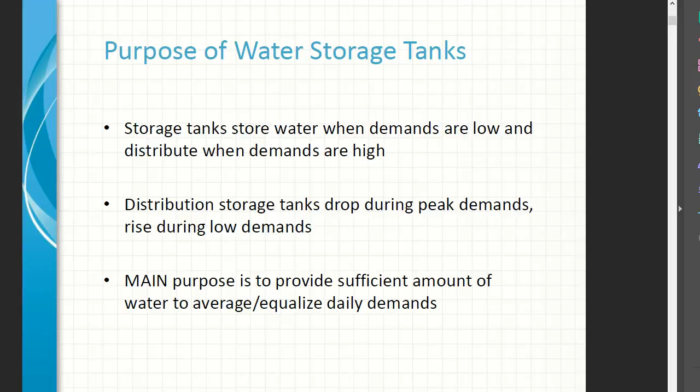What's the purpose of a water storage tank? Storage tanks store water when demands are low and distribute when demands are high. Distribution storage tanks drop during peak demands and rise during low demands. The main purpose is to provide sufficient amounts of water to average and equalize the daily demands.

We certainly know that a lot of fire systems are tied in with potable systems, so fire protection means meeting the needs of reserve storage. We've been through this horrible drought, and most of the utility agencies, in my opinion, don't have enough storage. I personally think it should be mandated that there's 30 days worth of supply if everything was to really go down the tubes. But we certainly want to meet the needs for average and peak demands, and meeting industrial water needs.

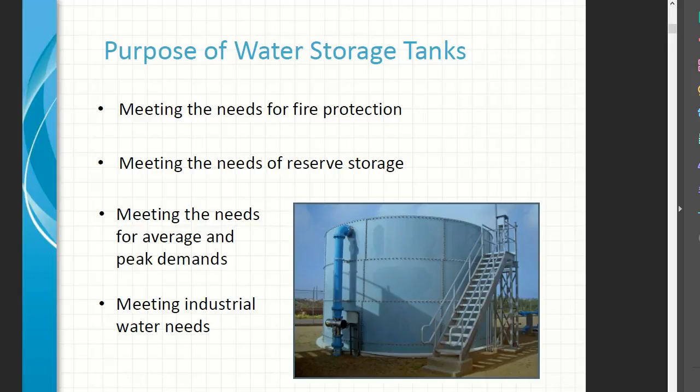The other advantages of water storage tanks: chlorinated water may be held for contact time. Power costs are reduced with off-peak pumping. It can serve as a sand trap to allow settling of sand and suspended solids. Inevitably with wells, there's a little bit of grit that comes up.

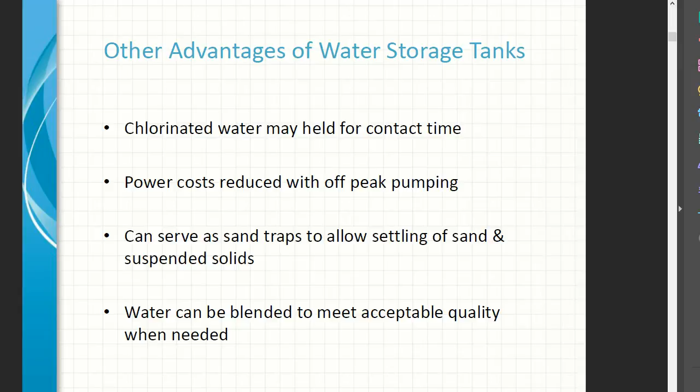Water can be blended to also meet acceptable quality when needed. Water blending is becoming more and more common, and what water blending is: if one of your MCLs, your maximum contaminant limits, is over, you might want to actually mix with another water source that has a lower level, and it'll average out and get within compliance.

So site selection, what are we looking for? Well, money is a driver on everything, but we certainly want to look at access to the sites, elevations available in or near around the area to be served, the relative cost of security, and the visual impact of a storage tank.

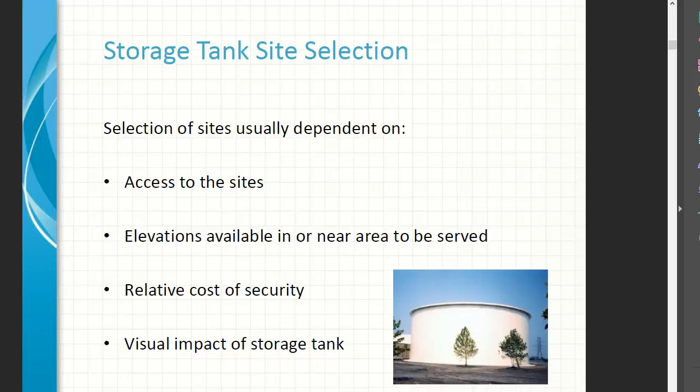We need to go ahead and have adequate covers to provide and protect against contamination. As of 2020, all reservoirs are supposed to be covered. That's a big hit for a lot of these small districts that have open reservoirs right now. It's very expensive to cover these. Drains and overflows shall be protected from cross connections to protect against contamination.

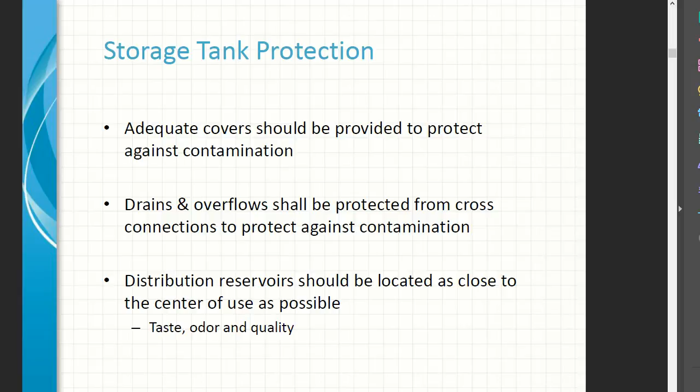The distribution reservoirs should be located as close to the center of the use as possible. And again, because of taste and odor and the quality of the water, we want to keep it fresh.

We have several types of water storage tanks: ground level, which are standpipes and reservoirs, elevated ones, buried ones, hydropneumatic ones, and clear wells.

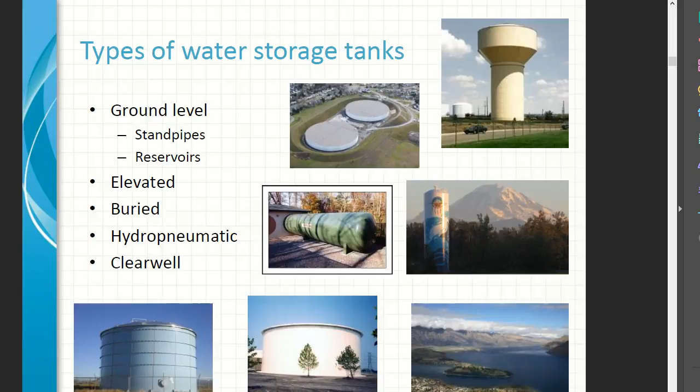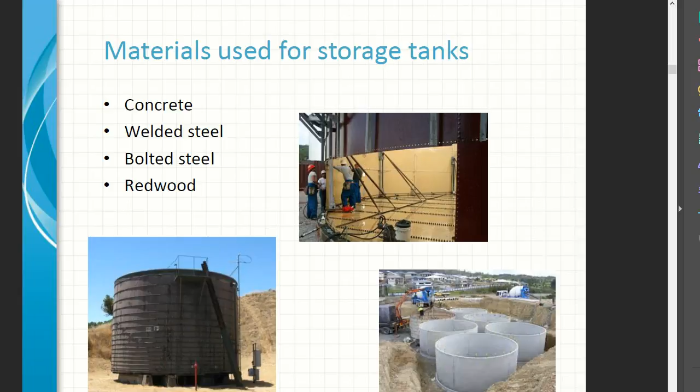What materials are used for storage tanks? Concrete, welded steel, bolted steel, and redwood. The upper picture is a bolted steel tank being put together. The lower left is a redwood, and the bottom right is a cast-in-place concrete.

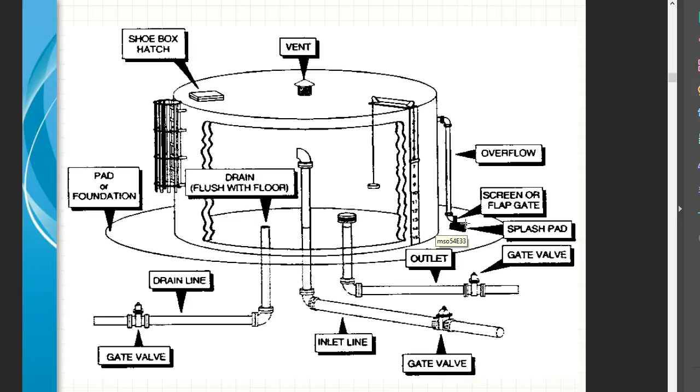So this is a picture about volume math. I know we had a lesson on math, but this is pretty basic, and all of you should have a pretty good grip on this at this point. If not, I urge you to go ahead and get into one of the tutors.

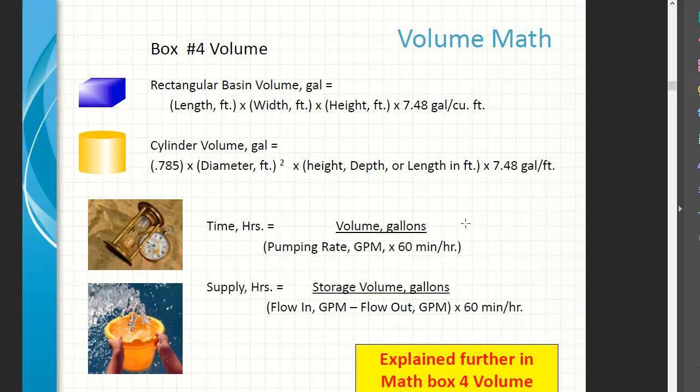So, partially buried storage tanks. What's the risk of those? Well, they can actually float right up out of the ground with upward force. Upward force is when you have a high water table and the tank empties, and it's like a beach ball. It wants to pop right up out of the ground.

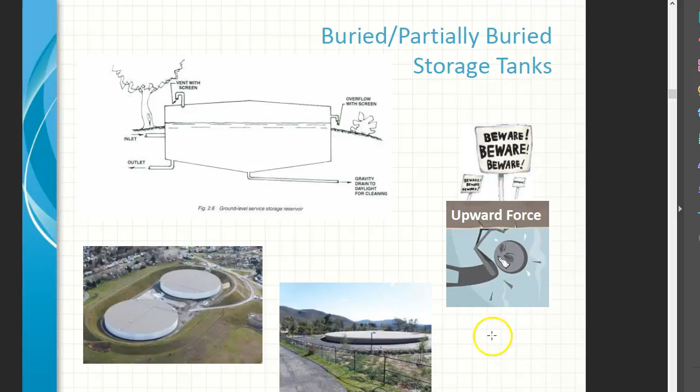You have all types of tanks, including some really huge submerged tanks, and these are very expensive. So again, we're talking about upward force, and that's a Box 3 math pressure.

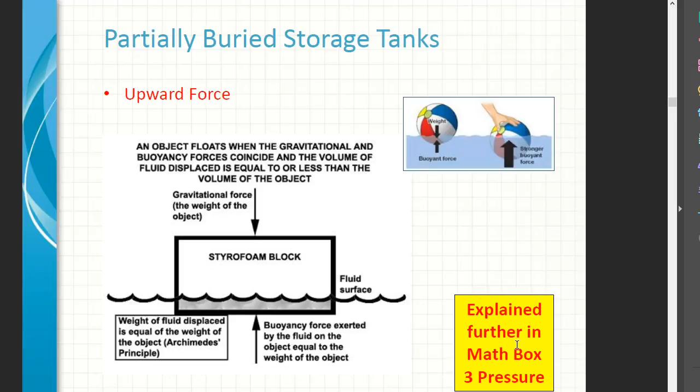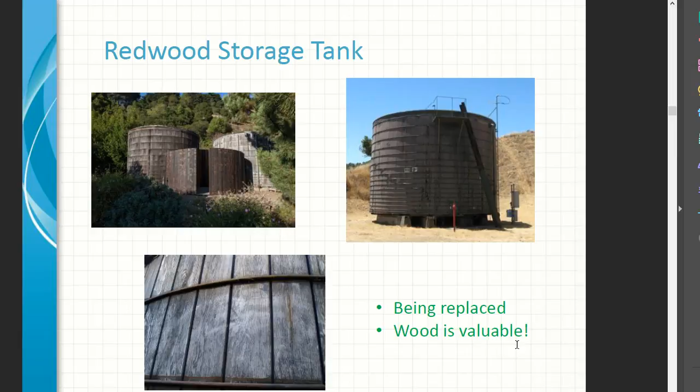Redwood storage tanks. There's a lot of them still out there. They were built out of the old growth redwood from way back at the turn of the century, and it's very valuable wood. If you're replacing that tank, you know what? You can sell that tank to a wood recycler. They remill it and make it into flooring and all different kinds of things for decorative purposes. A lot of Starbucks actually have redwood storage tank pieces in them.

Clear wells are usually at the treatment plant. They're used for contact time in the chlorination process. Contact time is slowing the water down because you want to make sure your chlorine has an adequate chance to work and eat up those bad things in there before it goes out into the distribution system. Now, you certainly want to have some extra chlorine, which is your residual, so when it goes out into the system, it's still protecting from any contaminants it could pick up in transportation through the system.

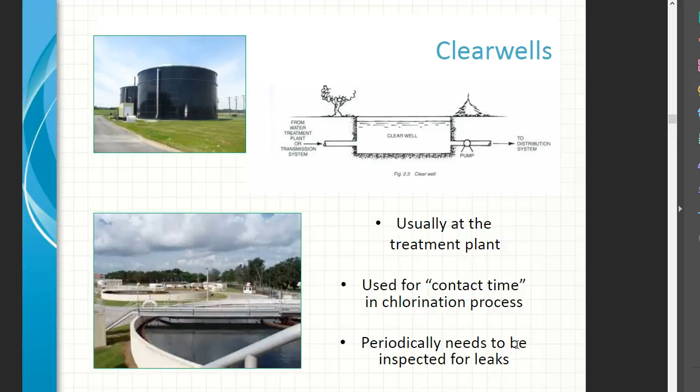You certainly need to make sure that you periodically inspect your tanks. It's just part of the gig.

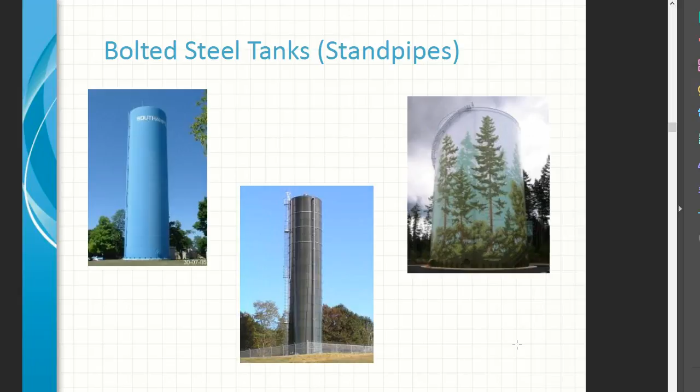Bolted steel tanks are also called standpipes, and the definition of a standpipe is it's taller than it is wide. You have elevated steel storage tanks - you see a lot of these down in the flatlands. The reason is you pump the water up and then utilize gravity to distribute it through your system.

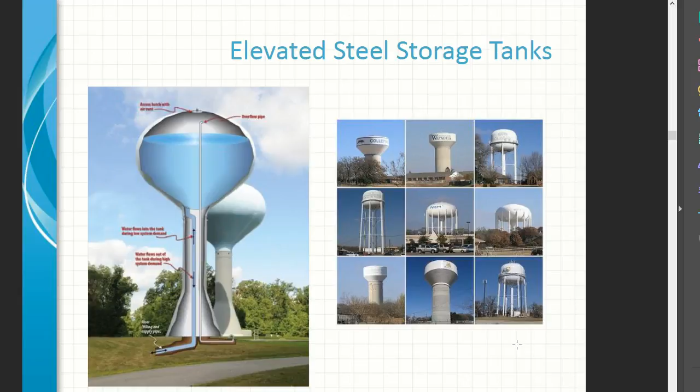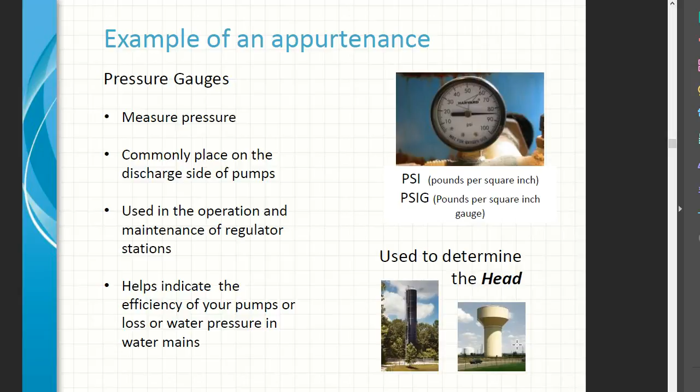Here's some examples of appurtenances, which are like gauges or anything additional that goes on the system. It could be a pressure sensor, it could be an air relief valve, but it's not part of that core distribution system - it's an add-on. It's like an option to a car.

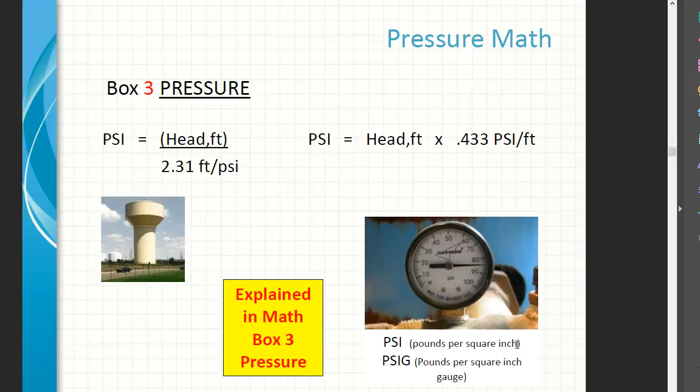And again, we talked about pressure. Head feet, 2.31 feet per psi, and the head foot is 0.433 psi per foot.

Standpipes are tanks that have a height greater than their diameter. Elevated tanks are used to maintain uniform pressure, but the pressure varies due to the tank level.

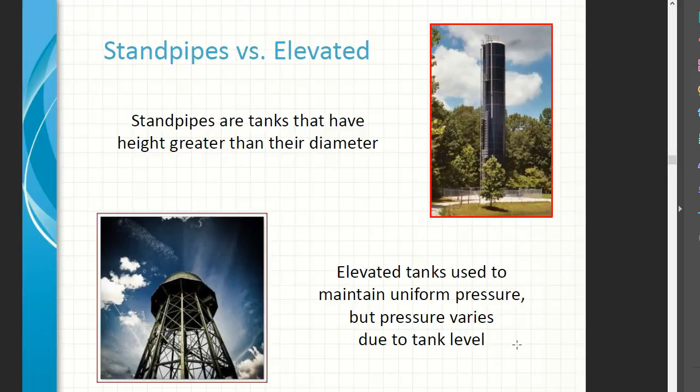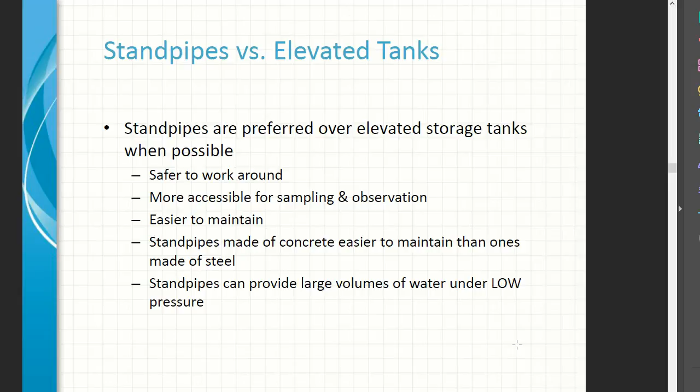Standpipes are preferred over elevated storage tanks when possible. They're safer to work around, more accessible for sampling and observation, and easier to maintain. Standpipes made of concrete are easier to maintain than ones made of steel, and standpipes can provide large volumes of water under low pressures.

Hydropneumatic pressure tanks - you see these little blue ones all the time in residential systems, but they make them in all different sizes. This one looks like it's on just a small well system. What happens is the air is compressed up at the top, and it helps balance and push that water through and keep a nice solid balance.

They're usually found in smaller water systems. They must contain the proper amount of air to be effective, and due to the high pressure in tanks, exercise extreme caution. The ones that are bigger in commercial systems actually have a big old compressor that's pumping that air up.

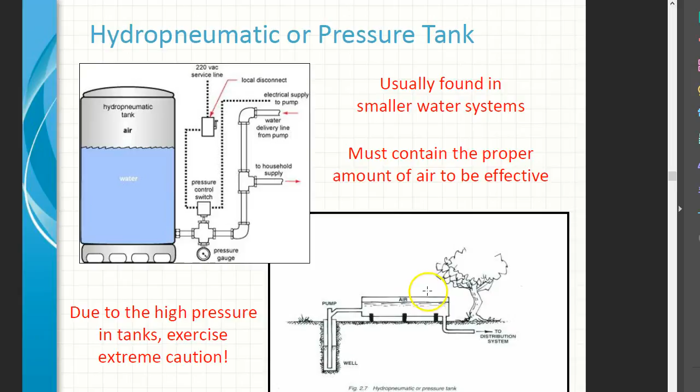So here's some big ones. You see a well house over here. Again, the air pressure in a compressed air tank automatically controls a water pump to start and stop. So again, it's all working off pressures. Lack of sufficient air can cause rapid start or stop and cycling in your pump, resulting in equipment damage.

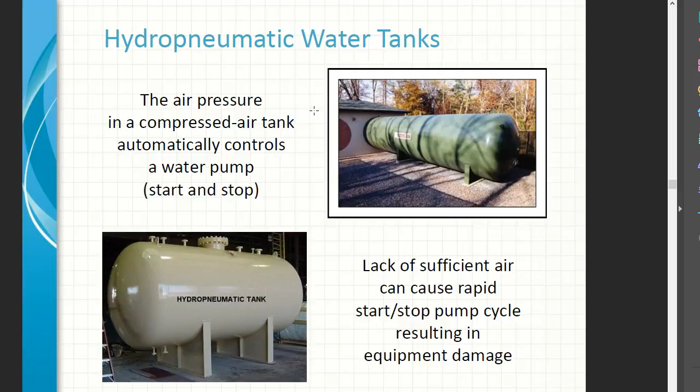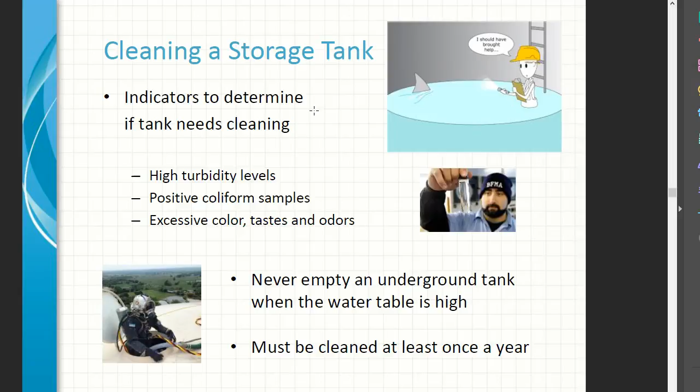Cleaning a storage tank - it's the law now that these are supposed to be cleaned yearly. This is one of those things where you see a diver going in, on the bottom left. There's about 10 companies in California that do a huge business of divers going in with pool vacs, cleaning them out, inspecting them, making repairs. Now, in the good old days, they used to drain these things, so you certainly understand the waste of water when we're talking about many tanks that are many millions of gallons.

Troubleshooting: using food-grade oil in pumps can serve as food for microorganisms in storage tanks. One of the things we do in this business is use either water-lubricated pumps or sealed bearings, because we don't want contamination near the water.

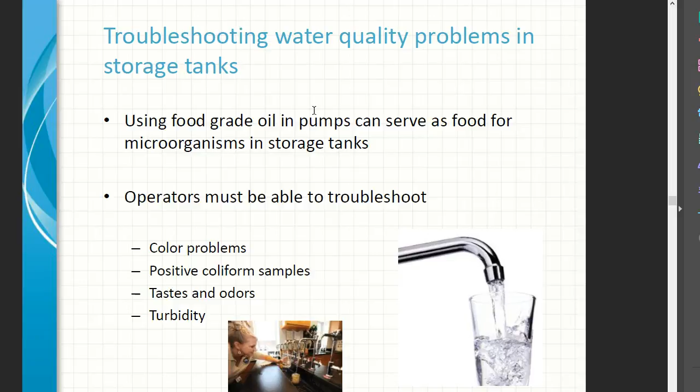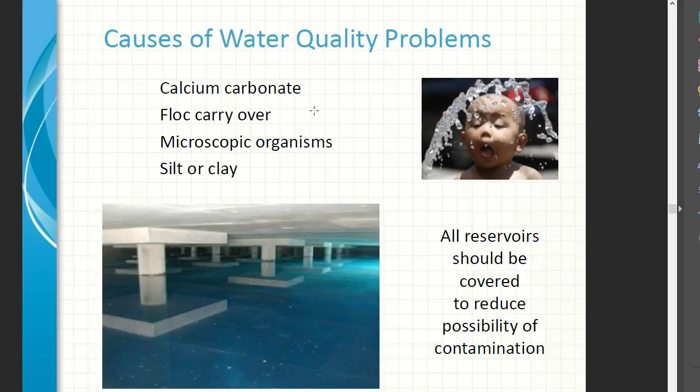Operators must be able to troubleshoot systems. You're going to get things like color problems, positive coliform samples, taste and odor issues, and turbidity. Some causes of water quality problems include calcium carbonate, floc carryover, microscopic organisms, silt or clays. All reservoirs should be covered to reduce the possibility of contamination.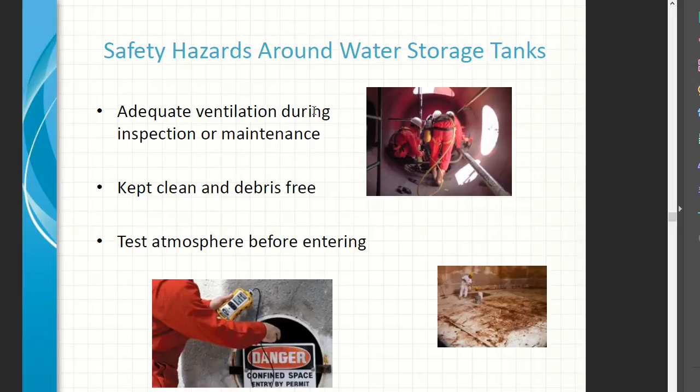You always want to be careful working around safety hazards near water tanks. Again, you've got a confined space, so you need to use the proper protocol and follow policy. There are lots of OSHA regulations on this, and a lot of companies specialize specifically in this.

If you're working on a ladder, you want to go ahead and belt in. Always use care when climbing ladders or stairs. On ladders on tanks, metal corrodes, and a lot of these tanks are older tanks, so you always want to do inspection on your ladders also.

Vents should never be blocked, to prevent pressure and vacuum problems when filling.

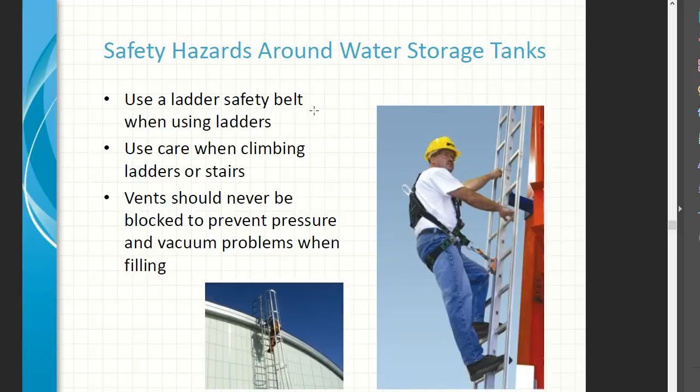Safety procedures that should be followed: wear a safety harness, test the atmosphere for oxygen. A person trained in tank rescue should be available at the tank entrance. Provide ventilation, especially when painting. Test the atmosphere for combustible and toxic gases.

I'd say the majority of operators are never going to be inside a tank because it's a confined space. That said, the larger the organization you work for, the more specialized they get, and the more equipment and things they'll do themselves.

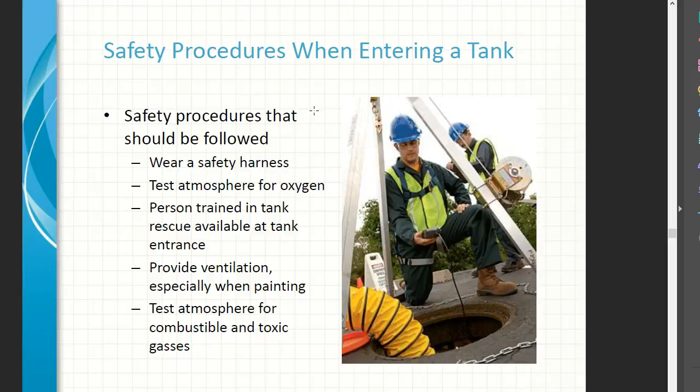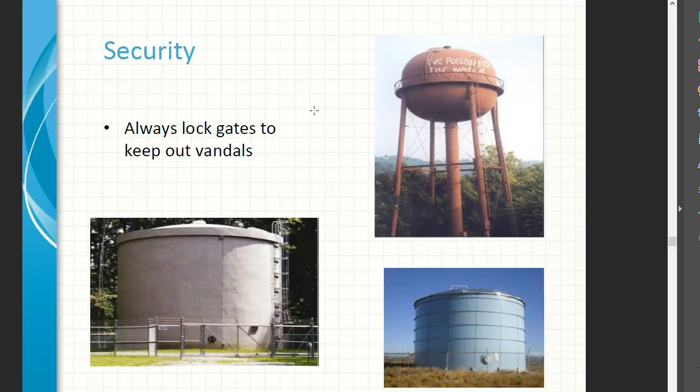Get the word out to your customers: do not drink any water. Start the testing process. You always want to make sure your gates are locked to keep out vandals, high school kids, and theoretically terrorists. This is something that since 9/11 has really ramped up through Homeland Security.

And again, this is not what you want your lid to look like.

If you do get involved in painting, drying time is critical, as well as the temperature it's done in—you should not be painting in the wintertime when it's cold. Oftentimes these are very specialized materials, costing hundreds of dollars per gallon, best applied at 60 to 80 degrees. They're all different with their own spec sheets.

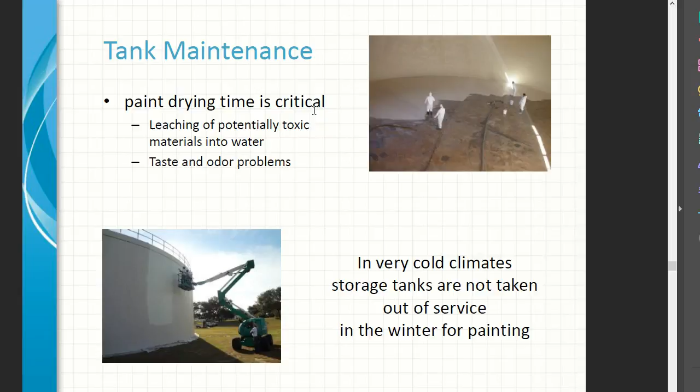Tank corrosion: some of the highest paid people in the bigger utility organizations are the civil engineers who specialize in corrosion, because things cost so much for the infrastructure. They can afford to pay those design engineers and corrosion engineers pretty much the same as a general manager makes, which is a boatload of money.

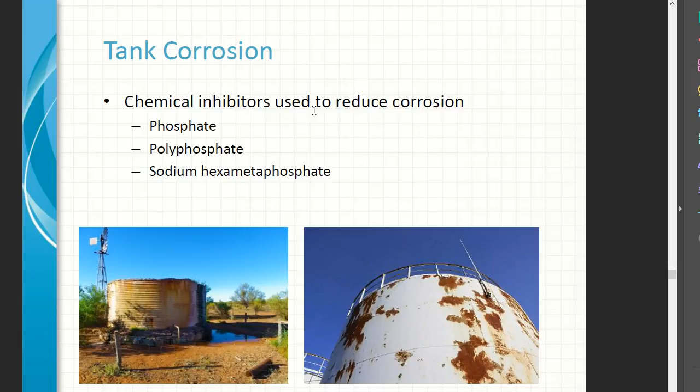Starlight, starbright—well, hey, if you're in the tank looking up through the lid and that's what you see, you've got some serious issues going on.

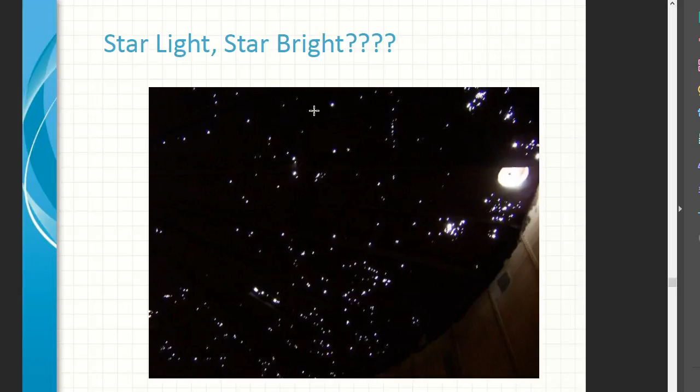Disinfection is the inactivation or destruction of disease-producing organisms. Storage tanks should always be disinfected if there's been any opportunity for contamination. Once a tank has been disinfected, the water and disinfectant must be properly disposed of.

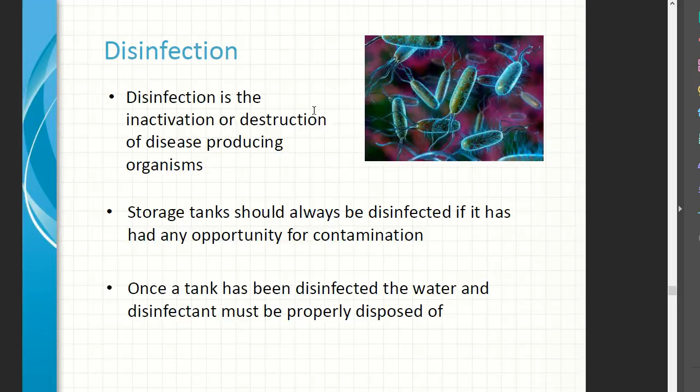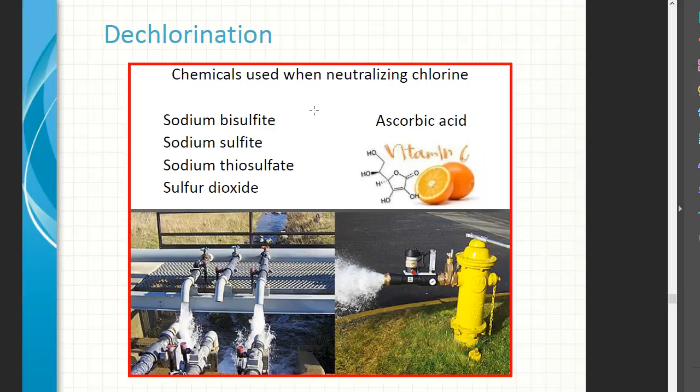The most common way to neutralize is with ascorbic acid, which is actually vitamin C—they use a hockey puck sized piece of it to neutralize the water, making it healthier for the environment. Other neutralizing agents used are sodium bisulfite, sodium sulfite, and sodium thiosulfate—the latter is what you see in our little test jars for BACT and coliform tests—and sulfur dioxide is another one.

Vacuum in the system: back siphonage may occur, causing negative or below-atmospheric pressure. Back siphonage from a cross connection and an unapproved water supply could cause contamination.

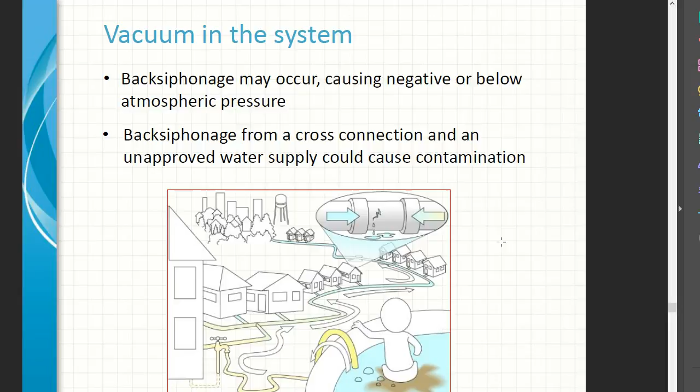Vacuum in the system, what happens? Immediately you have to go ahead and do a boil water notice, and you start sampling, flushing the system to remove the contamination. A boil water notice is pretty extreme.

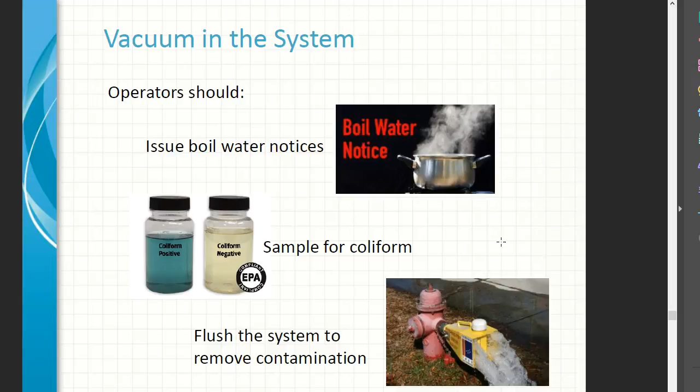High pressure in the system: we use pressure regulating stations and pressure regulating valves that reduce high pressure to acceptable levels. Ideally at our households we want 40 to 60 pounds.

A lot of these systems work on gravity, and there's pressure zones if you think about it, coming down the side of a mountain. Obviously you're going to have more pressure at the bottom than at the top, just because of gravity and the way PSI works.

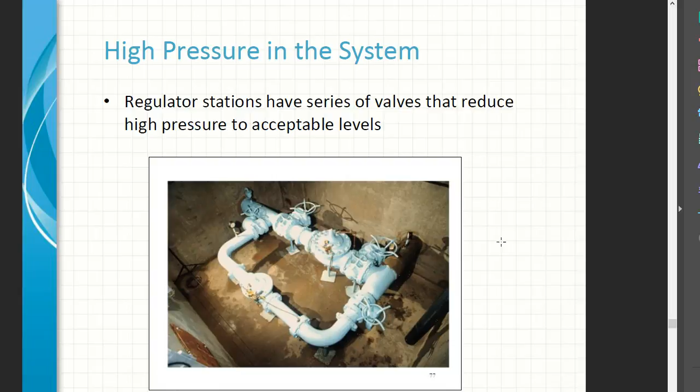Here's a graphic of a pressure reducing station. Again, you have your upper zone with a gravity flow system, and by the time you get to the middle zone you're getting enough PSI coming down that you have to start putting pressure regulating valves in.

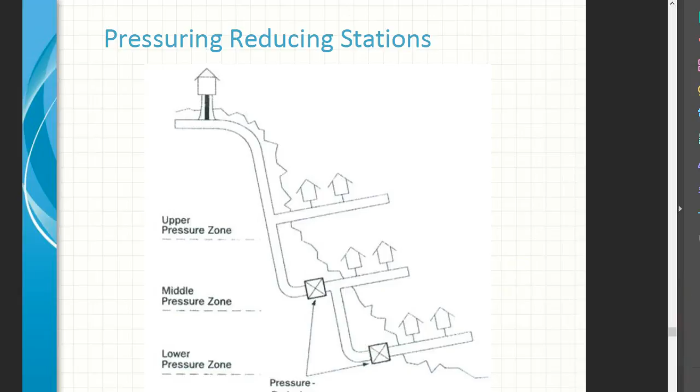Overflow vents on storage tanks should be screened, otherwise you're going to get rodents, birds, snakes, all that kind of stuff going up those chutes and into the tank. I hate to say it, but it happens all the time.

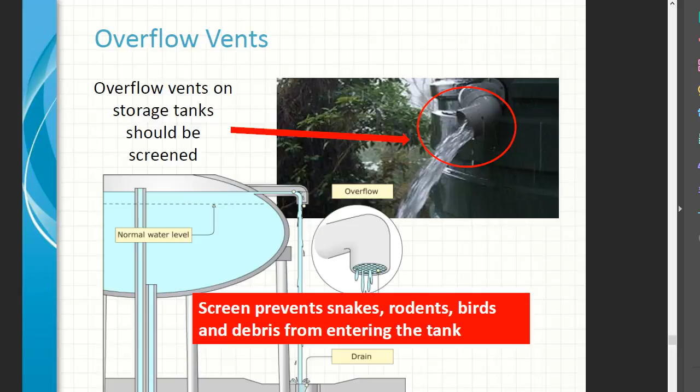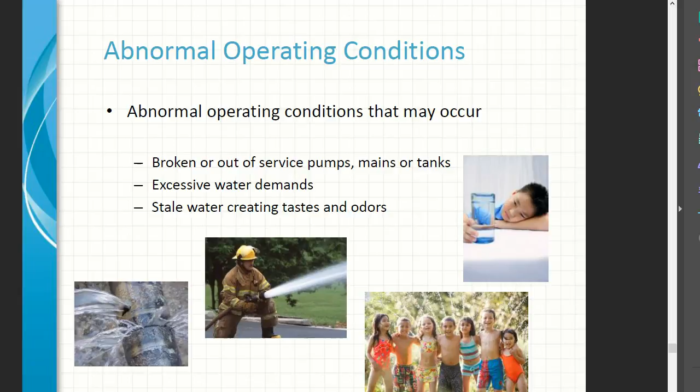Abnormal operating conditions may occur when you have a broken or out-of-service pump, main, or tank, excessive water demands, or stale water creating tastes and odors.

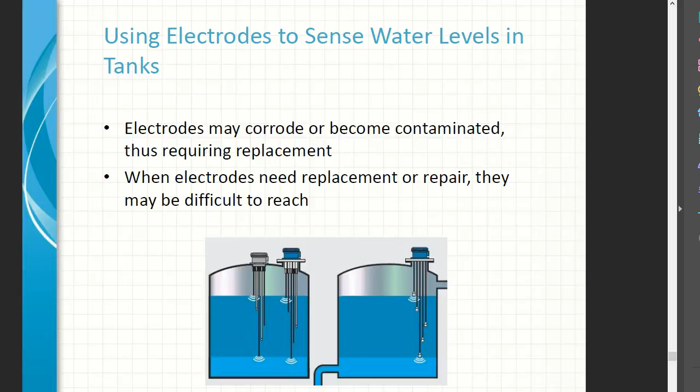Using electrodes to sense the water levels in tanks. There's a lot of electronics going into this industry at this point. They may become corroded or contaminated, thus requiring replacement. Hopefully they are fairly easy to replace, although some can be real bugaboos. When electrodes need replacement or repair, hopefully they're not difficult to reach, and remember, you're dealing with a confined space.

What is the application of pumps? There are many applications of pumps in water systems. Booster pumps do exactly what they say: they increase the pressure in the mains on the discharge side of the main pump. Centrifugal pumps cannot operate unless the impeller is submerged in the water.

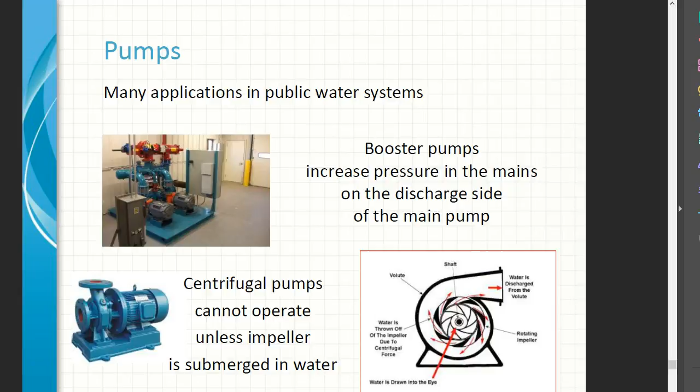Pumps may trip out and produce serious problems due to electrical power surges when they are operating at full capacity, as they're put online or taken offline. If your source pumps are operating at full capacity, there's a danger of back siphonage conditions in your system.

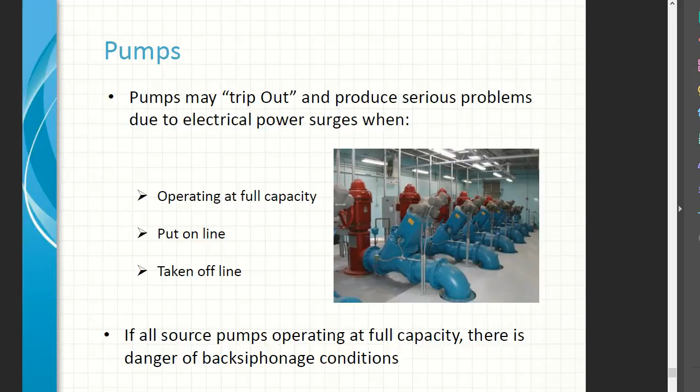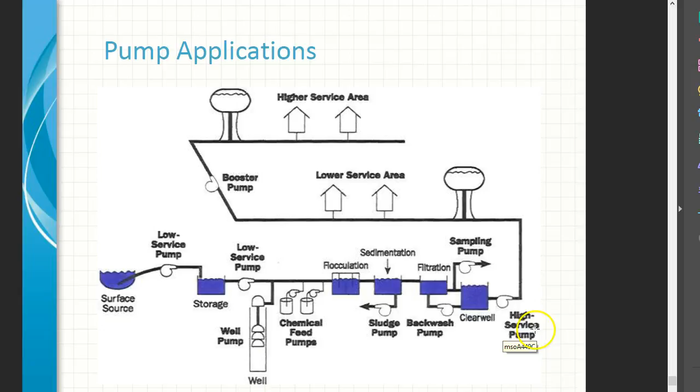This shows a lot of the different types of pumps we deal with: surface pumps, well pumps, low service pumps, and chemical feed pumps used in our water treatment process with flocculation and sedimentation. We have backwash pumps to backwash our filters, sampling pumps to pull samples, clear wells that sometimes have pumps controlling the flows, high service pumps, and again, booster pumps.

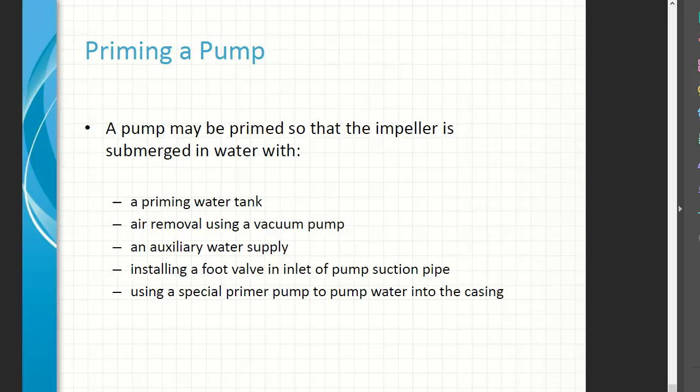A pump may be primed so that the impeller is submerged in water using a priming water tank, air removal with a vacuum pump, an auxiliary water supply, installing a foot valve in the inlet of the pump suction pipe, or using a special primer pump to pump water into the casing.